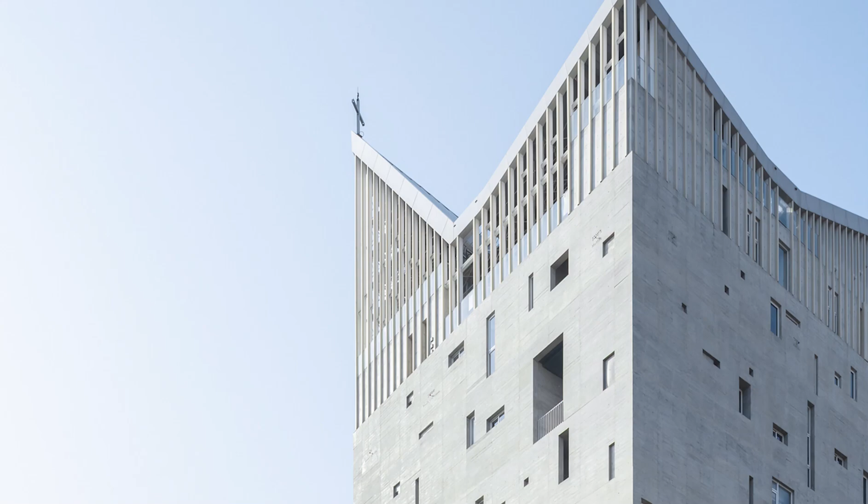We have to talk about our cultural heritage. As I mentioned, the first and second questions are about where I was from, where I'm from, and how I grew up, what I grew up with. So we have to think about our heritage. Are they always positive? Are they always enriching?

So reorientation means that we have to rethink about our heritage in an open mind. We want to think of this heritage not as something that we have to follow, but something that we want to open up, to rethink what part of this heritage belongs to our identity right now, and reopen that memory. This is a collection of practice that allowed us to rethink what's our heritage.

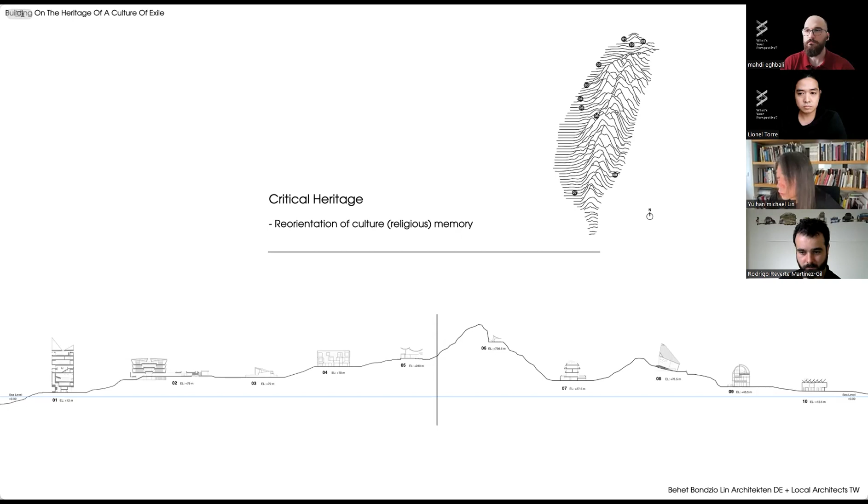On the screen right now, you can see several projects, building on different topography of Taiwan. So we first talk about how I come to this project, how do we get this project?

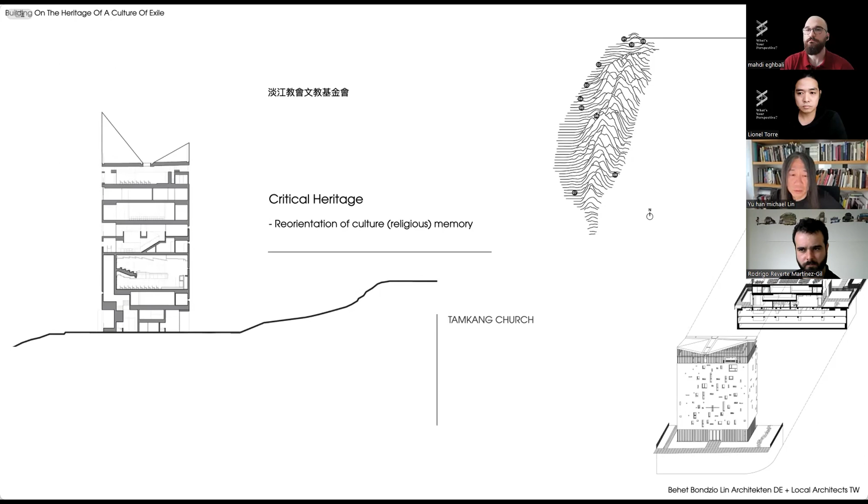It's through a competition. And the project is actually in north of Taiwan, about 1 kilometer away from the seashore.

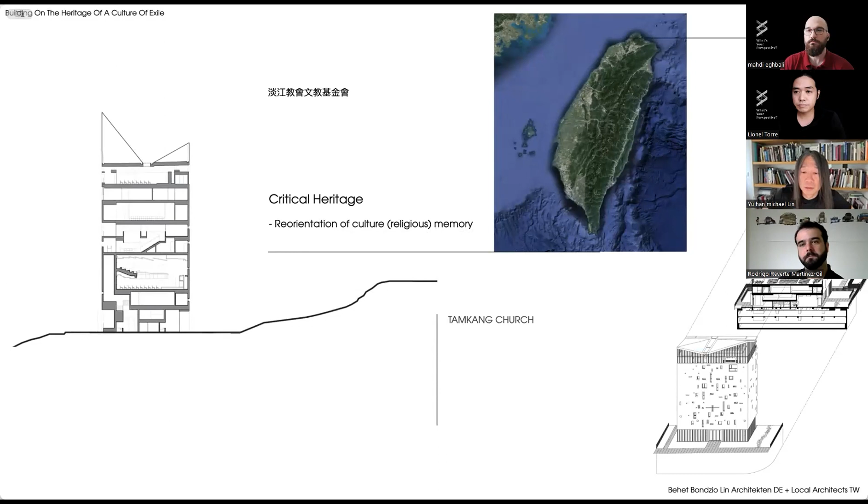To think about religion in Taiwan, we have to think first that the Christian religion is not coming from Taiwan. It's not like most of the part of the world. Christian religion is coming through maybe colonies or the invaders.

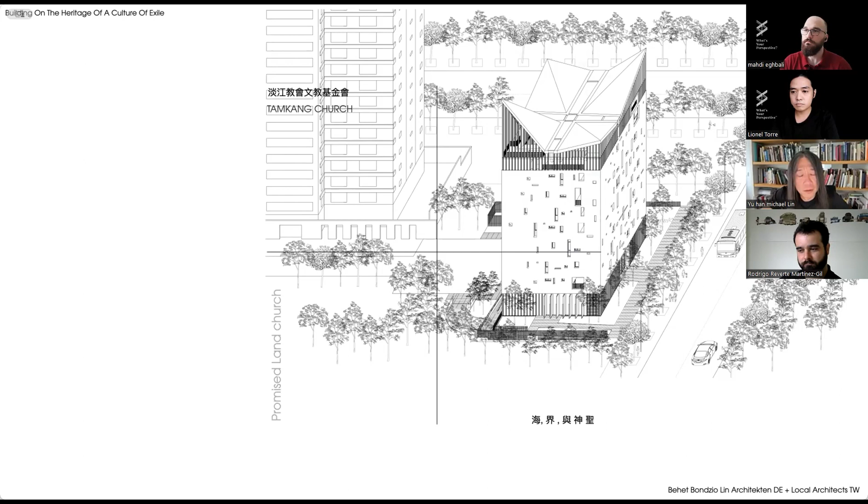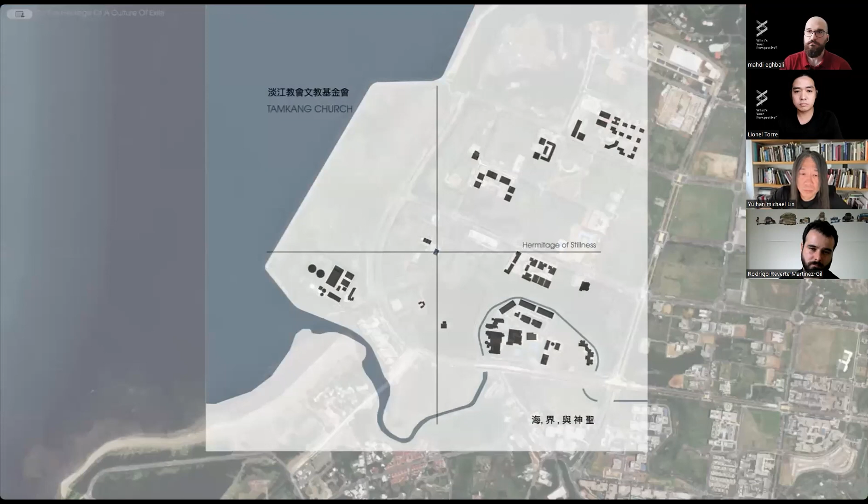This is in the very north of Taiwan, and it's facing the ocean. Both projects I'm going to talk about today are facing the ocean. So, of course, our first question is: what kind of man-made structure should we build or design by the ocean? What is the legacy or heritage of a building located next to the ocean?

The second question we have to ask ourselves is that sacred spaces nowadays are very different than sacred space 50 years ago, very different in Taiwan, Iran, wherever. They play a very different role. So what is contemporary sacred space nowadays? The third question we have to ask ourselves is the public nature of sanctity.

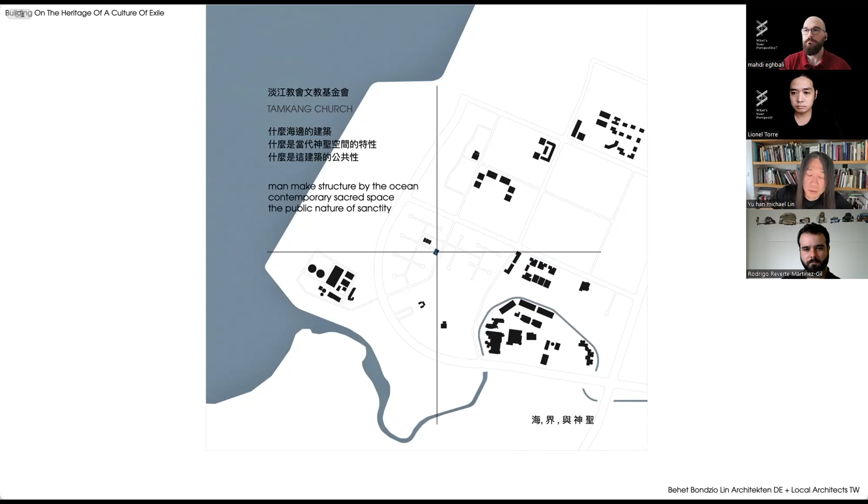The way we think about Christianity, the way we think about religion, is very different nowadays. So what is the public nature of this religion? I'll go through this very quickly.

There is a loneliness and solitude we can see from seaside architecture. I particularly like those bunkers and fortresses, oil tanks or lighthouses, sitting on the seashore.

And surely our first inspiration is coming from Michelangelo's design of the bastion fortress. This is probably the first design which is actually form-follows-function, in a way.

Because the form of the architecture has to follow the trajectory of the weaponry or the defense system. Hence, we see that most seaside architecture plays a very important role in defending against nature or defending against the enemy.

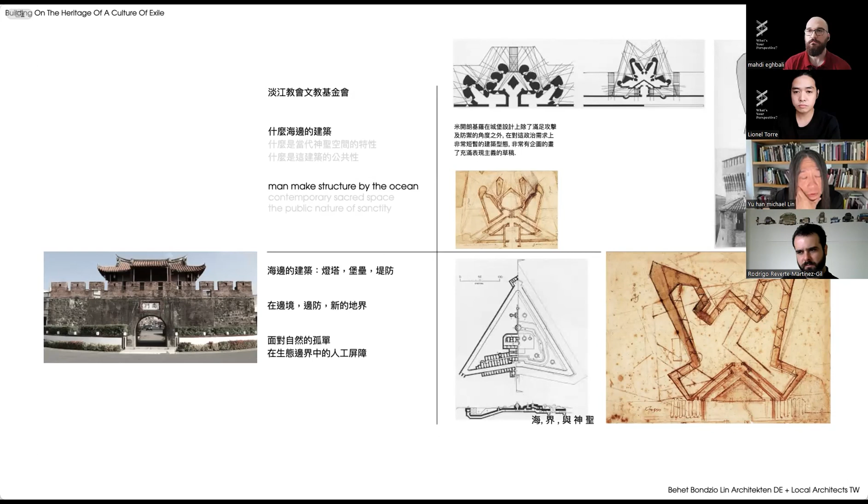So in this case, we have to come back to what is our heritage. Architecture, particularly religious and sacred architecture, the form of the architecture comes from its religion, from its ritual. So first we have to pray, and the praying is a gesture with a specialized language, which is the Bible. Such a gesture creates a form and creates a space that allows this gesture to happen.

So a lot of religious architecture comes from hosting such a special gesture — gesture specialized through the Bible. So we can see that through different periods of time, we have different ways of celebrating religion.

So pretty much we have to come back to Germany to think about whether church or religious architecture can still play a very important role as a social conduit. Conduit is a translation meaning something that acts as a mediator. Because of war, Christianity plays a very important role in World War I and World War II.

So in Germany during this time, churches were all bombed. After World War II, a lot of churches had to be rebuilt. But can we still believe in religion as a conduit, as a media? Because media is dangerous - we can see Nazi ideology was basically a play of media, in a way that Christianity became the source or basis of invasion or discrimination.

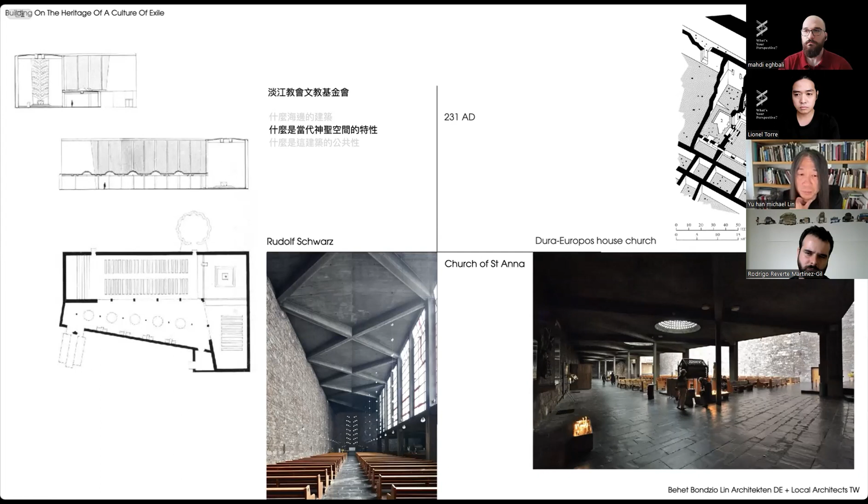So at this stage of architecture design in Germany, or even nowadays, you can see expression being excluded from most German architecture. German Expressionism was quite famous, but after the war, they were castrated of this potential, this power to express themselves. Or I should say, this is an appropriate reflection of the role religion should play - very modest, a carrier of meaning, but no longer an expression, no longer playing a role as media. It's quite dangerous. You can see this with the German architect Rudolf Schwarz.

You can see it's industrial, plain. There's no expression, only geometry, almost like mass produced. There's no deep meaning, but only a container of sorts that expresses contemporary meaning.

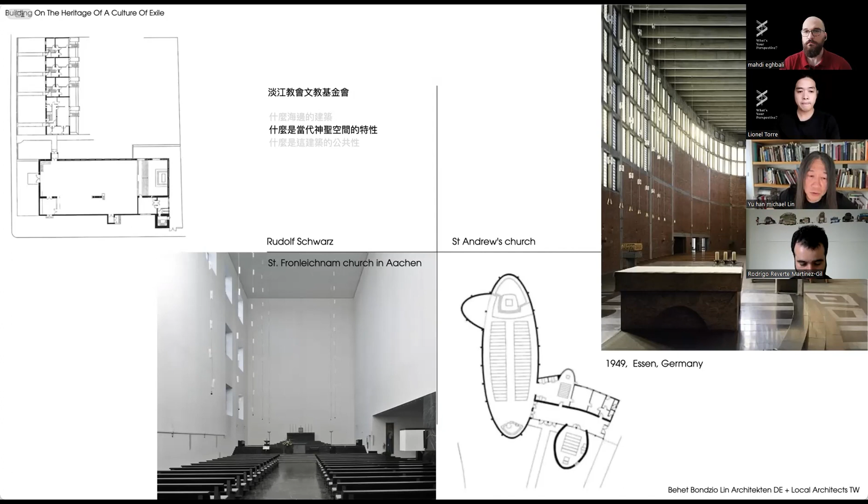On the left hand side you can see it's a very generic geometry, but you can see what makes this church interesting. This is actually one of the most favorite churches of Rafael Moneo - when he talks about church, he often takes this church as an example. What's quite interesting is the lower right hand side darkness, and the upper left hand side big windows. If those windows were small, we probably wouldn't see it as a church, because of the proportion, because of the simplicity, the inconspicuousness. This church represents the attitude of architects towards church design or religious architecture design.

This is probably the most expressive architecture in Germany right now - by Gottfried Böhm, the Church of Neviges. This is quite interesting: the building itself is expressive, but for him, it's actually a continuation of the public space of a marketplace. You can see in the sketch on the right hand side the alleyway on the side, almost drawn as a market, and the whole building is a poche of darkness.

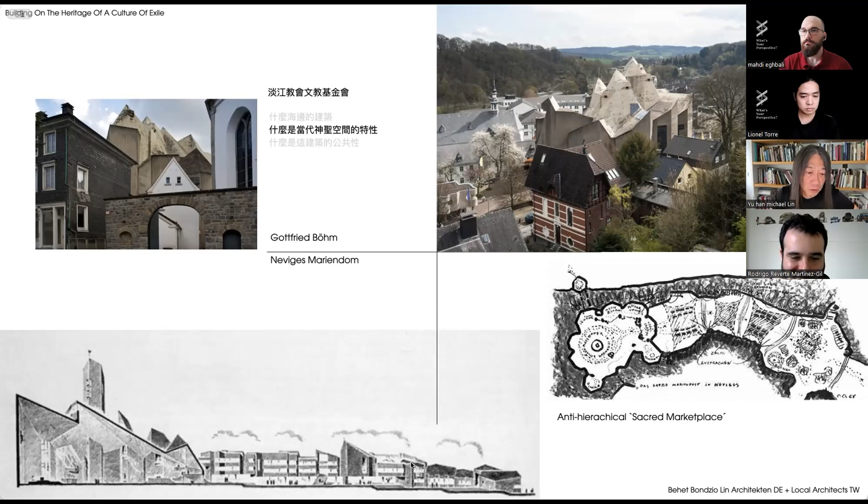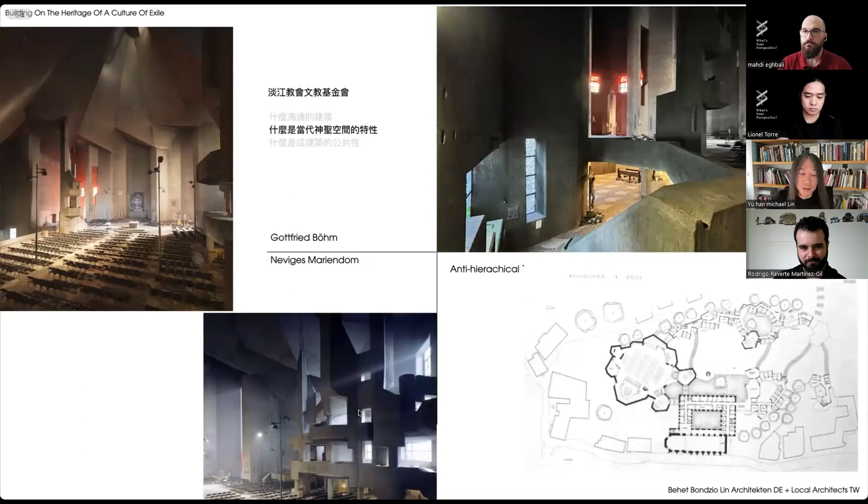After the war, a lot of architecture took the presentation of a bunker, but actually it's a combination of bunker and the topography of generic vernacular houses on the side. Quite interestingly, inside the church it's almost like you're walking on a street - it's inversed. You have the pitch roof, the balcony, almost like a celebration parade on the street, and the outside is just the presentation of the inside.

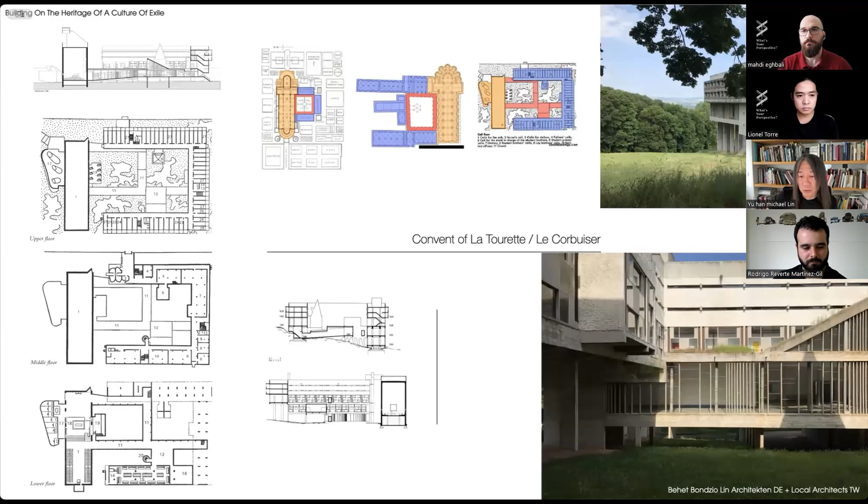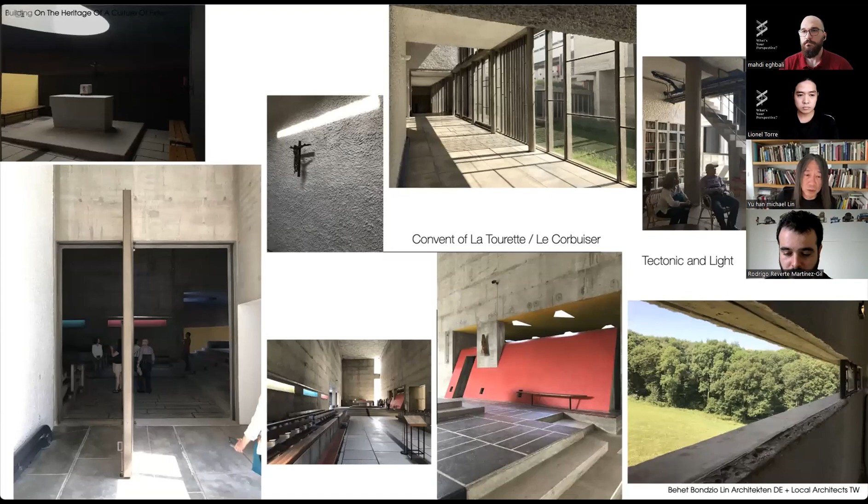And you can see in France, probably just 600 kilometers away, you have a different culture that celebrates every nuance of religion, using light to articulate the sanctuary, the holiness, the more mundane everyday life, but also the speciality. You can very carefully describe your belief through architecture, and architecture is the media, the conduit of such belief. What I like most is this piece of architecture by Emil Steffann and Nikolaus Rosiny.

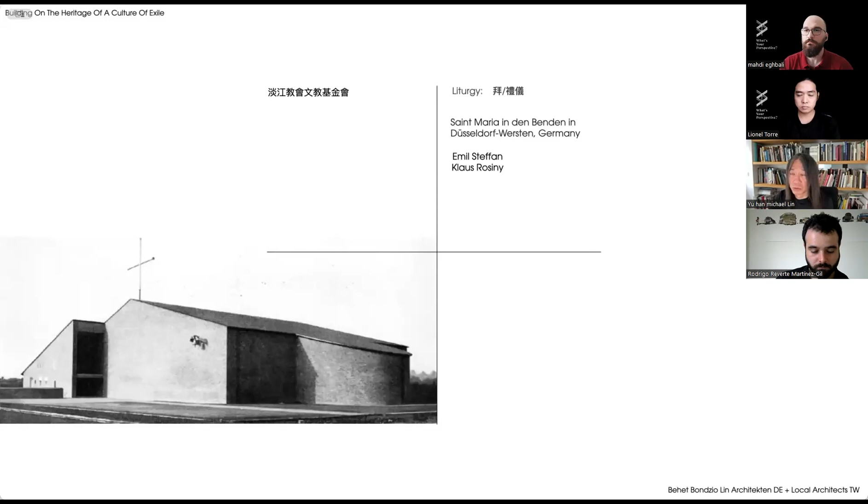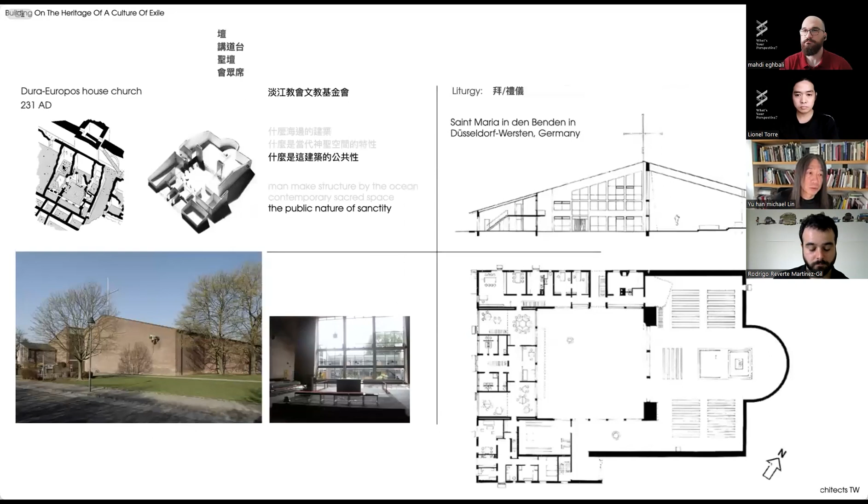It's almost like a huge - from outside you see nothing but a huge pitch roof, and the inside is a void, a courtyard. The outer space and the place for the audience to sit are completely changed - you can see they sit next to the altar, and surrounding this courtyard is everyday life. This building was actually very close to the first church, around 231 AD.

So we come back to talk about our church. Sorry, this took a bit long - it's fine. So the first question is about building a church in Taiwan. The land is very scarce in Taiwan, so the land price is very high.

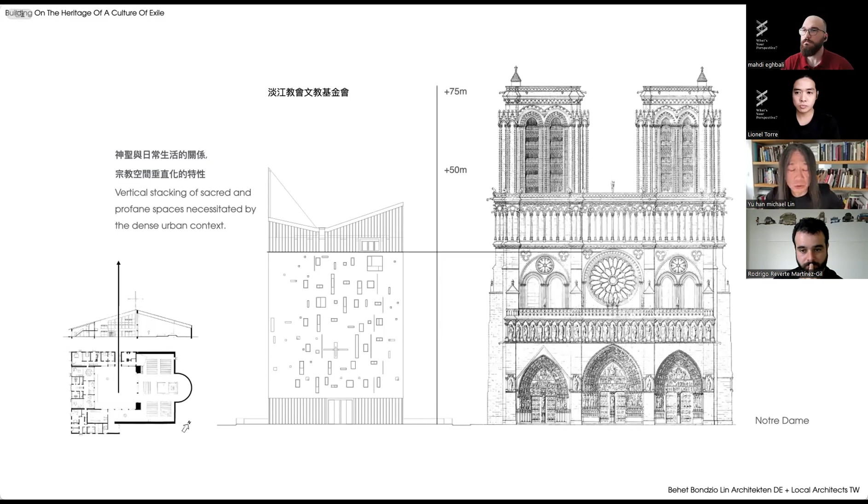Because we don't have so much land that is occupiable or usable, when we build a church we have to think differently than the churches we saw in Germany, which touch the earth - they have to verticalize instead. You can see the Tamkang Church we built is 50 meters, while Notre Dame is 75 meters, although Notre Dame is one building, but the Tamkang Church has a lot of functions inside. So first we have to deal with the verticality, and the first constraint or task is how do we design a church that requires 600 people for gathering within a 20 to 30 meter perimeter.

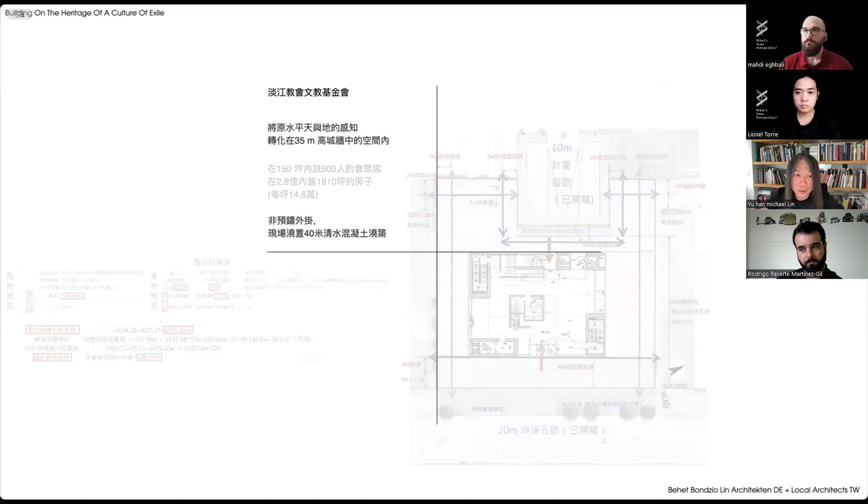So that's quite difficult. We saw from all the buildings outside, sitting on the seashore, there's always this sanctuary provided by this fortress-like building. So we decided very early on to use exposed concrete to face this harsher climate and topographical condition.

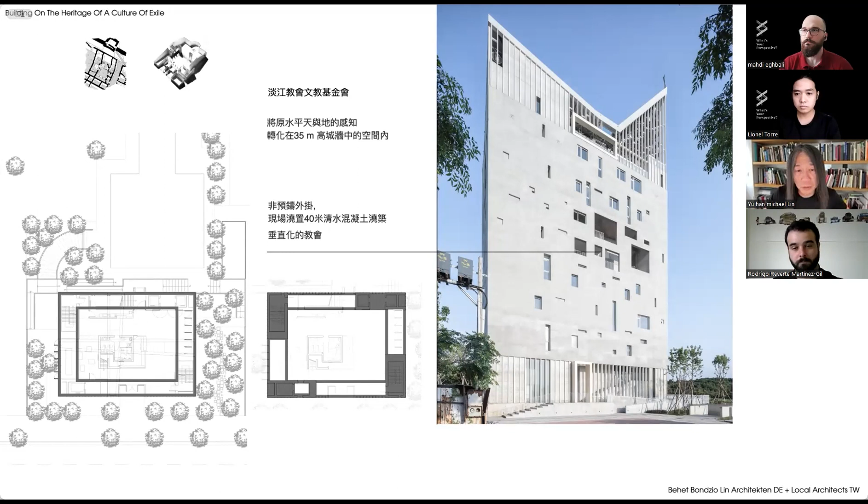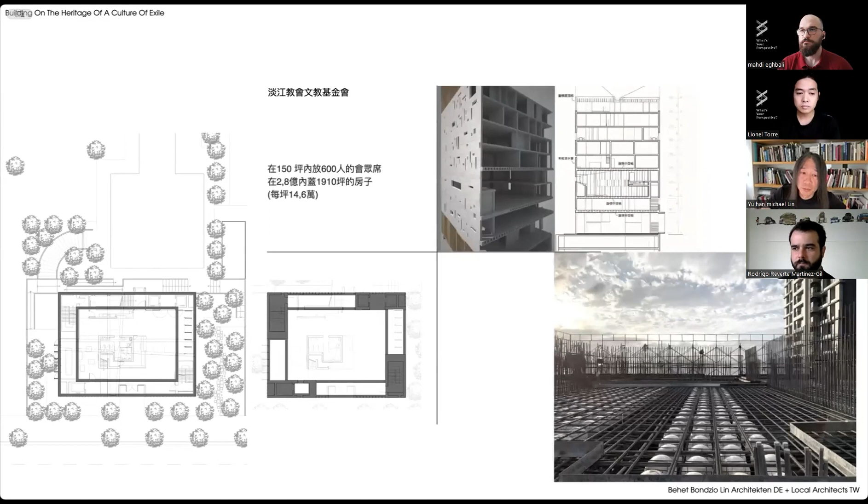In order to build a tower of 50 meters with concrete, which is very difficult because it's in-situ cast concrete, due to the earthquake risk in Taiwan we needed to lower the weight of the building. So we built all the cantilevers inside the building with this bubble or balloon inside the floor deck to reduce the weight, so the building would not be so heavy when it reaches 50 meters.

Functionally, there were two parts. First is this 3-meter zone which we created as a donut, and second is inside. The 3-meter zone is more or less a mediator or buffer between outside and inside, and it gives us the chance to create a passage all the way to the functions upstairs. So the building is almost like a poche, a void-out design.

On the third and fourth floor is the main gathering hall. On the fifth and sixth floor is the children and youth church. On the top is the office building, and on the very top is the wedding and baptism church.

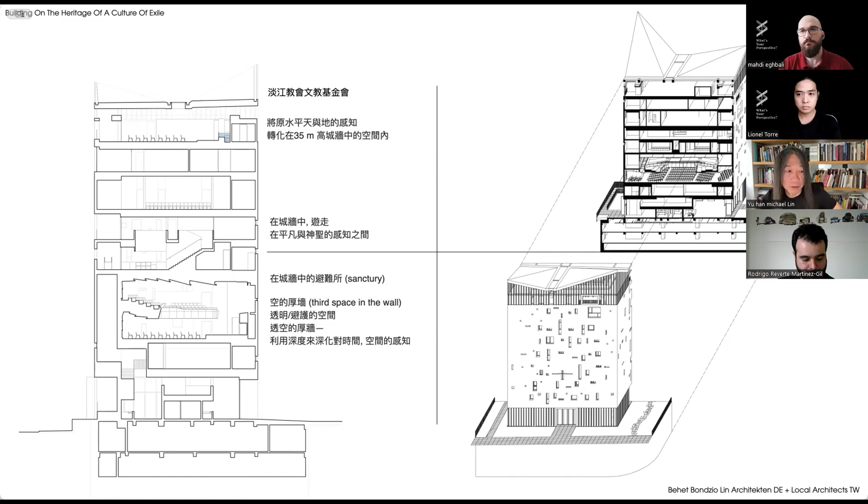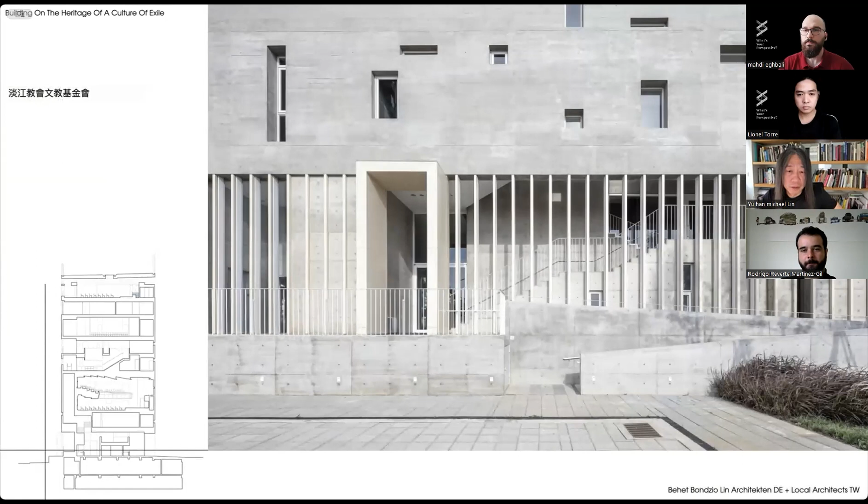So on the ground floor, as open as we can, it's almost like a promenade all the way to the third and fourth floor.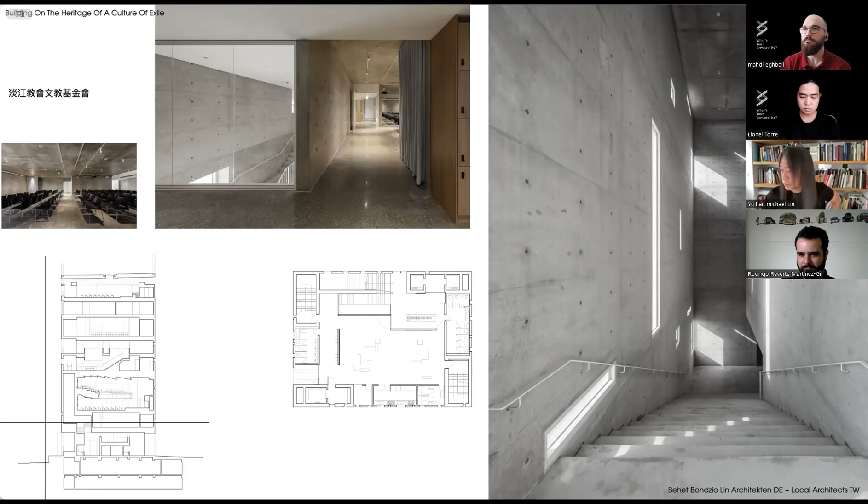We'd like to say, when we think of those holy or sacred spaces in Germany or Europe, you see the main aisle with light coming in through the rose windows — quite dramatic. But here, the pathway is where we want to find this elevation of consciousness somehow, through the opening of the window and the light.

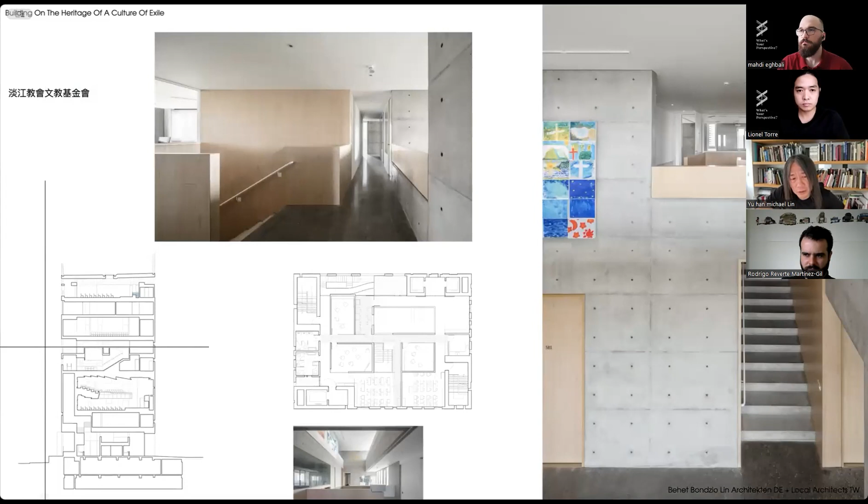If you see the main gathering hall, it's actually almost like a concert hall. Upstairs is where the children are, and those are all in-need children — from very poor families or children with learning disabilities. So this is almost like social welfare from the church side.

Upstairs is more or less for teenagers. They can gather as a band and practice there, on top of their office space.

On the very top is their Baptist church, and you can see in the middle there's a cross, and the horizontal bar is where the water comes out. On the niche on the right-hand side is where the priest will stay for people to pass by.

And on top of the ceiling there's a cross, almost like a cross of light, pressing into the ceiling or the skylight in a way — almost like the church is carrying the light of the cross. We designed the cross so the light comes down at 2:00 in the afternoon, when most of the time the baptism ritual is performed, and the light will be cast exactly on top of the kids being baptized.

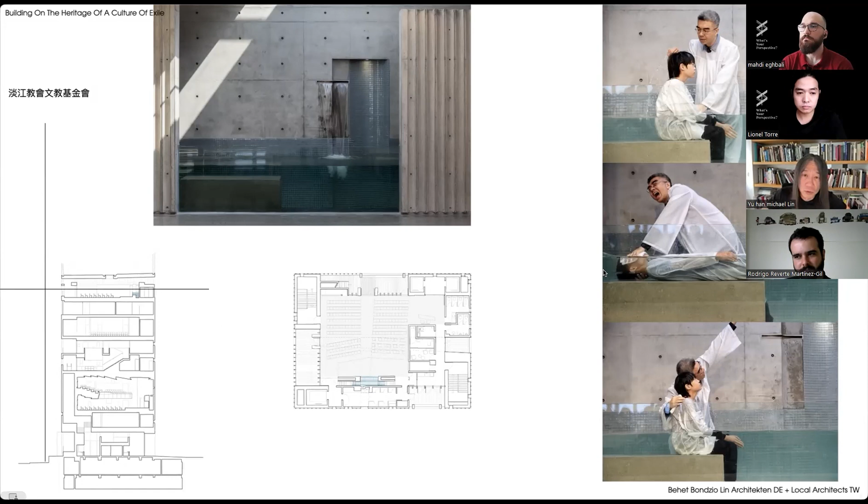In terms of materiality, we thought about how to use one material with different surface treatments to apply to different uses of the space. In the entrance, there are three types of concrete: on the right-hand side, very smooth exposed concrete; on the floor, poured concrete, sanded and polished with wax.

On the wall is a story of the first missionary who landed in Taiwan, carved using digital application.

On the top, outside the church, the formwork of the wood has a very rough pattern, so you can see the wood pattern on the surface. On the very top we have a very rough board for this altar.

Inside, you have a space for wedding couples to confess — it's almost like a confession room. Outside we have this very rough, almost brutalist architecture treatment of the surface, to contrast its roughness with the lightness of the water.

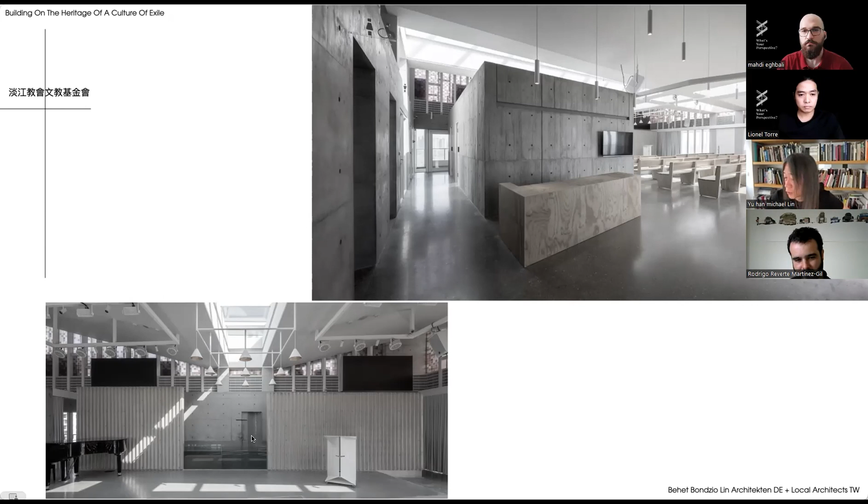So this is how we think of the building as carrying the cross, rather than carrying the light — the light of the cross, like Jesus.

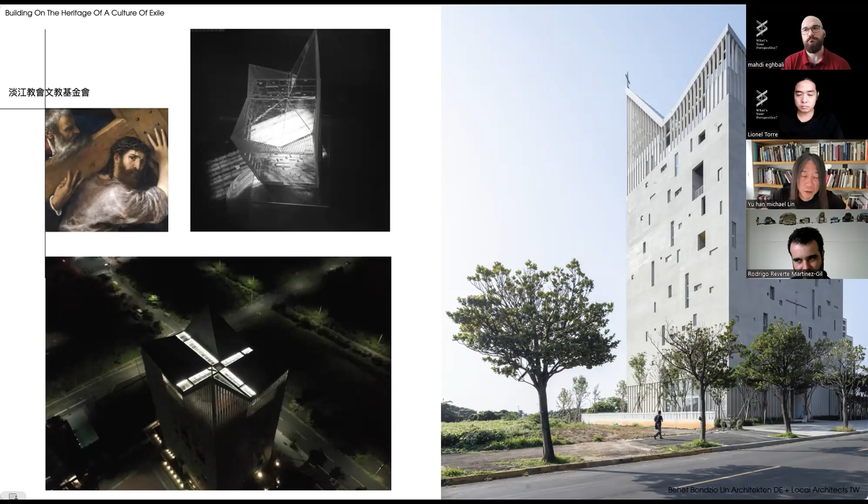Sorry Mahdi, I have to call to talk about Christianity.

So that is our church. I'll go much faster for the next project.

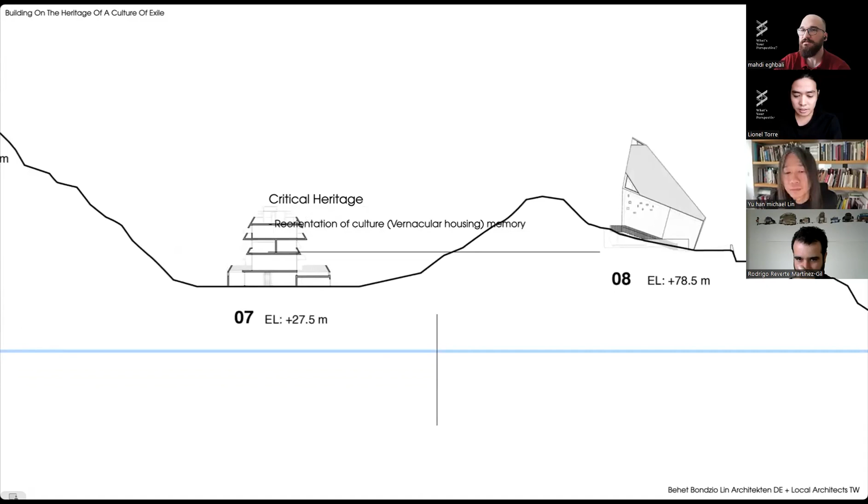I have a question regarding the design, because what's unique about this church is that you actually stack the spaces one on top of the other. I understand it's based on the program, but was it limited by the size of the lot, or was there another intent why you stacked the floors?

Most churches are like one or two stories high, but as I mentioned, the land is quite expensive and most of the land should be developed. There's a certain floor area you're able to build on a given lot, so to acquire a huge piece of land to build only one or two floors is too expensive. That's why in most metropolitan areas, like Taipei and other big cities, you see high-rise buildings because land is more expensive.

So most of the churches we build in Taiwan are almost 10 to 14 floors high, to be able to accommodate the use and the program they require.

Lastly for me, because in churches there's also this processional aspect, like how you enter the church. How were you able to manage that, considering it also has certain spaces you had to accommodate?

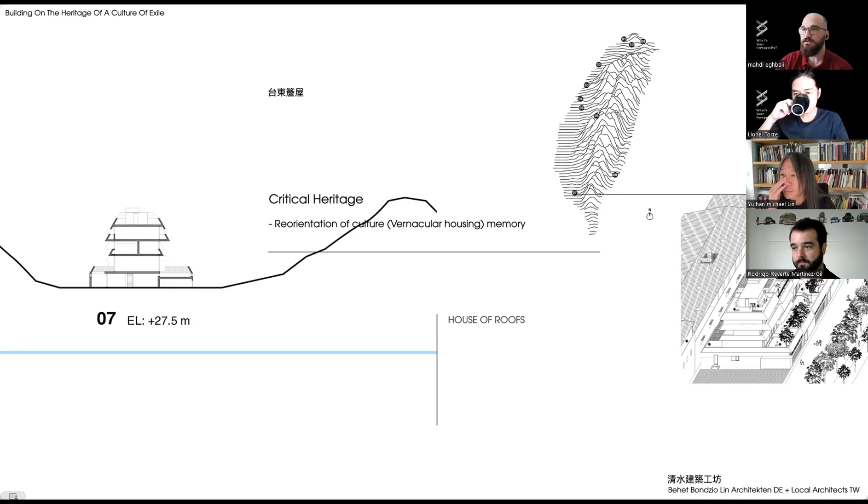Before we move on, can I ask about the window pattern on the facade? It looks a bit randomized. I want to know if it was based on light reflection on the interior, or if you wanted to showcase the case study you were explaining, about how it feels being inside the city and getting that experience?

This is a great question, one I've often been asked. To answer it, we have to go back to the constellation, how we create a composition that is not regular, but with randomness that can still be read. There's organized chaos inside. I think the oxymoron plays a very important role in our design, in the sense of how something can be so random but organized. For the next project as well, how can something be so heavy but feel so light? When we do architecture that is so heavy, how can it still flow?

That's basically what we all try to do as an architect. In this case, there are several clues you can look at. You can see there are always long windows, and on each floor, for instance, here and there.

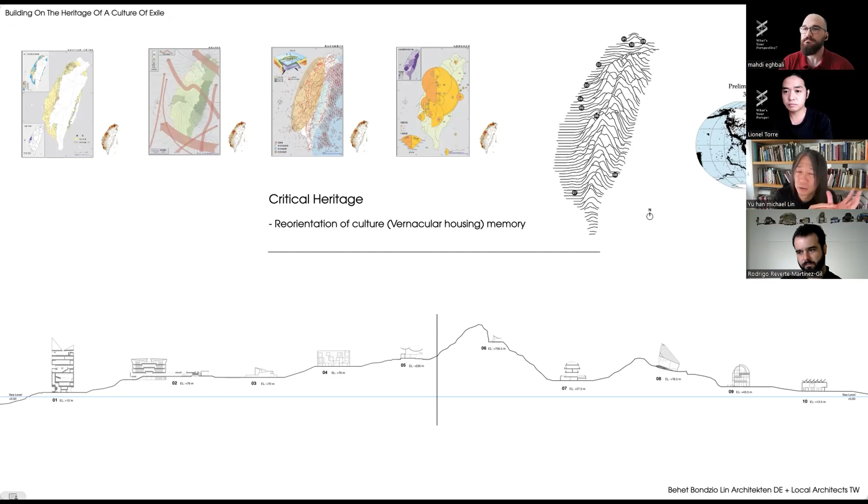I like this image only because the proportion of the buildings is quite equal. You can see how it's been developed. The roof is always there because a 9-meter roofscape is required in Taiwan. You can see most of the buildings on the lower floors are more translucent, transparent, or physically accessible—only the window parts open differently.

So there's a similarity I like that can only be seen with the context in mind. It's almost trying to read this—of course this is a monument, the church is always a monument, but I really tried to do it differently by alternating the opening of the facade, giving it a less temple-like feeling and more a feeling close to the context. So in a way, yes, it's a monument, but I would like to see a fortress as a monument as well, rather than the church.